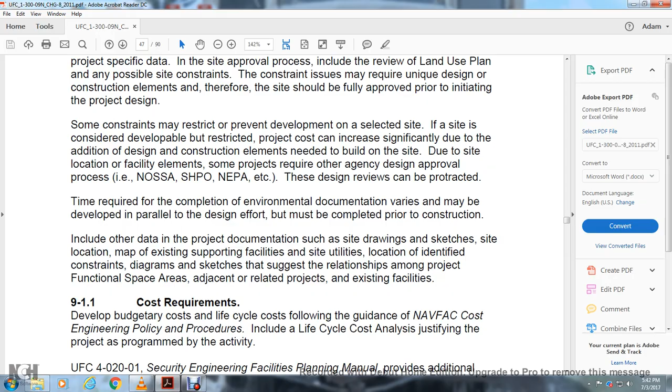Other data to include in project documentation: drawings, sketches, site location maps, existing support facilities, site utility locations, and identified constraint diagrams or sketches that suggest the relationship among project functional space areas, adjacent related projects, and existing facilities.

Cost requirements, development and budgetary costs, and life cycle costs should follow the guidance of the NAVFAC cost engineering policy and procedure, including life cycle cost analysis justifying the project's program activity.

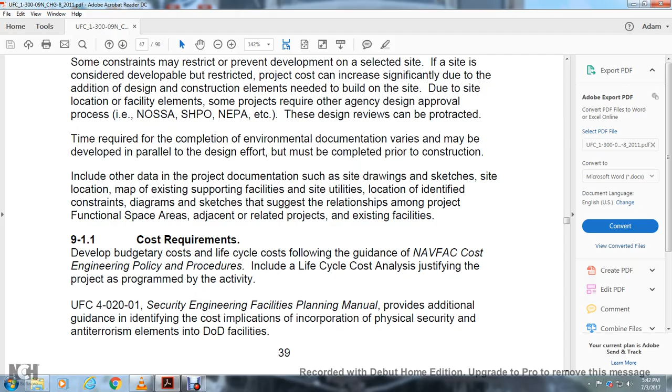UFC 4-020-01, Security Engineering Facilities Planning Manual, provides additional guidance for identifying cost implications in incorporating physical security and anti-terrorism elements into the DoD facility.

Department of Defense Form 1391. Typically, for Special Projects and MILCON projects, the DD Form 1391 identifies the special project or MILCON project number that makes available the review of the

EPG database. If a project does not use the EPG, attach the necessary project documentation to the products. Electronically approved projects reflect the EPG electronic signature in the EPG database. For more information about special authorization, see OPNAV

11010.20G, Furniture, Fixture, and Equipment (FF&E).

For specific guidance on furniture, fixture, and equipment, see UFC 3-120-10, Interior Design.

Engineer study: solar analysis, engineering analysis, and specific requirements concerning the engineer study. See UFC 3-410N, Mechanical Engineering Design, and Leadership in Energy and Environmental Design, or LEED.

Criteria and environmental requirements require contact for all required surveys, information gathering, and analytical testing. Specific guidance for conducting field investigations is provided within the specifications. See UFC

3-800-10N, Environmental Engineering for Facility Construction, review installation restoration plans (IRPs) and GeoReadiness databases, identifying development constraints that may include site contamination, hazardous waste, lead paint, PCBs, asbestos-abated issues, and controls related to natural resources such as historical structures, endangered species, wetlands, and the Clean Water Act.

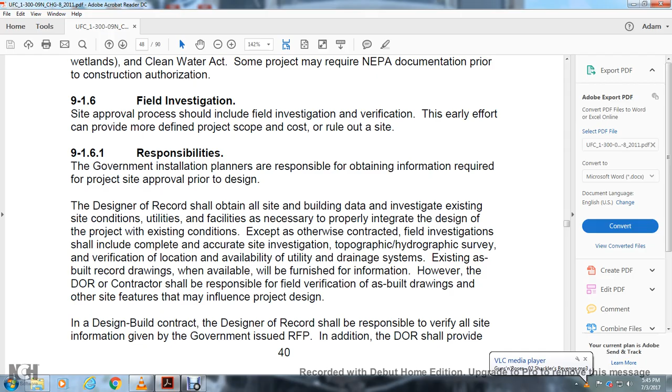However, the designer of record or contractor shall be responsible for field verification of as-built drawings and other site features that may influence project design. In a design-build contract, the designer of record shall be responsible for verifying all site information in the government's request for proposal.

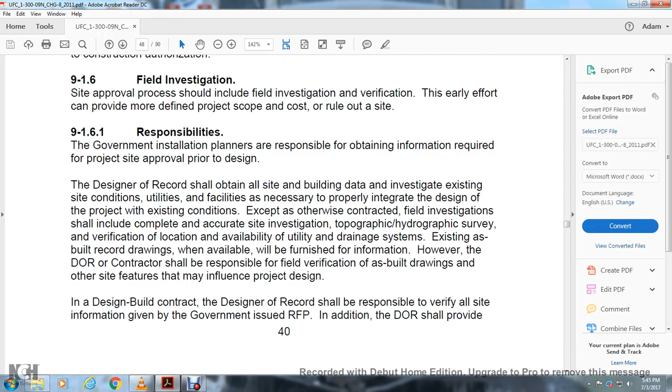In addition, the designer of record shall provide additional field investigation and verification of existing site conditions as may be required to support the development and design construction of the project.

Coordination: all site surveys, including topographical, hydrographical, and soil surveys, shall be coordinated with a representative of Public Works, Utility, Engineering, or Energy teams other than NAVFAC design personnel during the execution of field investigation work.

The designer of record shall also be responsible for all damages to personal property that occur as a result of fault or negligence.

The designer of record shall take proper safety precautions to protect the public and government property from physical hazards and unsafe conditions. Upon completion of the field investigation, return the property to its original condition, except as otherwise released in writing by the client activity.

9-1.7 Life Safety Code Survey. For specific requirements regarding Life Safety Code Surveys, see UFC 3610N.

Pavement evaluations: for specific requirements covering pavement design evaluations, see UFC 3210N. For topographical survey, the specific requirements concerning the topographical survey are found in UFC 3210N.

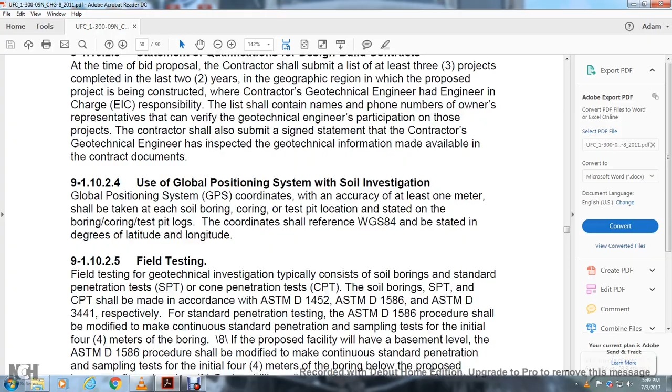Using global positioning system with soil investigation: GPS coordinates with an accuracy of at least 1 meter shall be taken for each soil boring or test pit location, stated on the boring or test pit log.

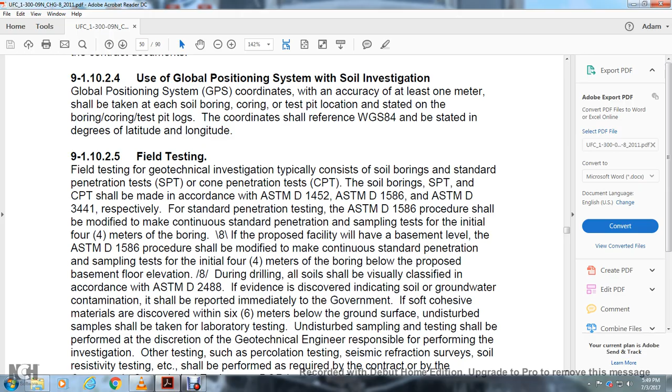The coordinates shall also reference WGS 84, stating degrees in latitude and longitude. Field testing of the geotechnical investigation typically consists of soil borings, standard penetration tests, and cone penetration tests.

Soil borings, SPTs, and CPTs shall be made in accordance with ASTM D1452, ASTM D1586, and ASTM D3441, respectively. The Standard Penetration Test, ASTM D1586, procedure shall be modified to make continuous standard penetration sampling for the initial 4 meters of boring.

If the proposed facility will have a basement level, the ASTM D1586 procedure shall be modified with continuous standard penetration sampling for the initial 4 meters of boring below the proposed basement floor elevation.

During drilling, all soils shall be visually classified in accordance with ASTM D2488, and if evidence of underground tank, soil, or groundwater contamination is discovered, it should be reported immediately to the government.

If soft cohesive materials are encountered within 6 meters below the ground surface, undisturbed samples shall be taken for laboratory testing. Undisturbed sampling and testing shall be performed at the discretion of the geotechnical engineer responsible for the investigation.

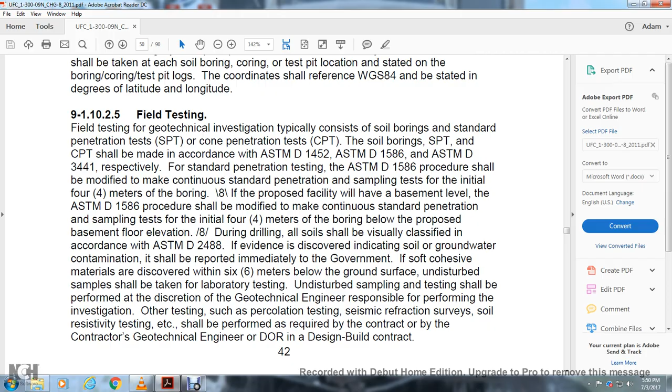Other tests, such as percolation testing, seismic refraction survey, and soil resistivity testing, shall be performed as required by the contract, or by the contractor's geotechnical engineer, the designer of record, in the design-build contract.

9.1.10.2.6, Use of piezometers. A drilling technique is used to allow measurement of the water table level. The contractor shall install 2 piezometers per drilling site to more accurately measure the depth of the water table.

Piezometers are required for stormwater pond investigations. Piezometers are not required if the groundwater level can be accurately measured during the drilling operation, or if there is no evidence of the water table within the depth of the boring or zone of influence of the foundation structure.

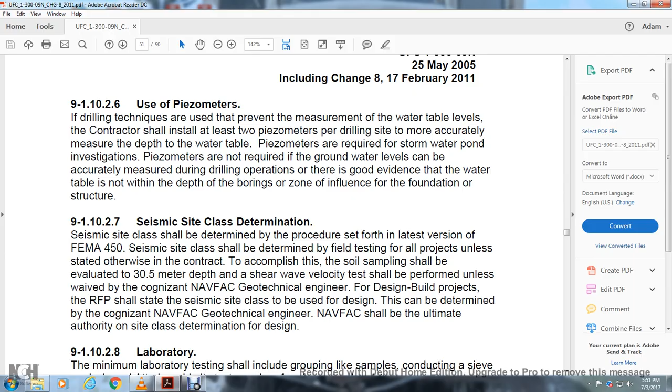Seismic site and class determination: seismic site class shall be determined by the procedure set forth in the latest version of FEMA 450. Seismic site class is determined by field testing on all projects unless stated otherwise.

The soil sample shall be evaluated to a 30.5 meter depth for shear wave velocity. This shall be performed unless waived in coordination with the Navy facility geotechnical engineer for the design-build project.

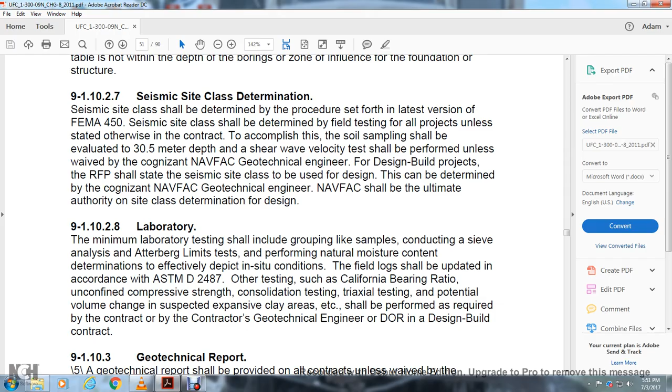The request for proposal shall state the seismic site class to be used for the design. This can be determined by the cognizant Navy facility geotechnical engineer. Navy facility engineering shall be the ultimate authority on site class determination for the design.

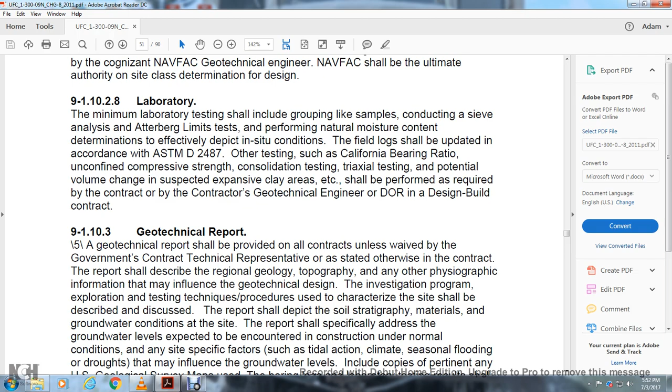9.1.10.2.8 Laboratory. Minimum laboratory testing should include groups of like samples conducting sieve analysis, Atterberg limit tests, and performing natural moisture content determination to effectively depict in-situ conditions. The field log will be updated in accordance with ASTM D-2487. Other testing such as California bearing ratio, unconfined compressive strength, consolidation testing, triaxial testing, potential volume change, in suspected expansive clay areas shall be performed as required by the contractor, geotechnical engineer of record, in design-build contracts.

9.1.10.3 Geotechnical Report. A geotechnical report shall be provided on all contracts unless waived by the government contracting officer's technical representative or as stated otherwise in the contract. The report shall describe regional, geographical, topographic, and other physiographic information that may influence the geotechnical design. The investigative program, exploration, and testing techniques and procedures used to characterize the site shall be described and discussed. The report shall depict soil stratigraphy, materials, and groundwater conditions at the site, specifically addressing the groundwater level expected to be encountered during construction under normal conditions, and any site factors such as tidal action, climate, seasonal flooding, or droughts that may influence the groundwater level.

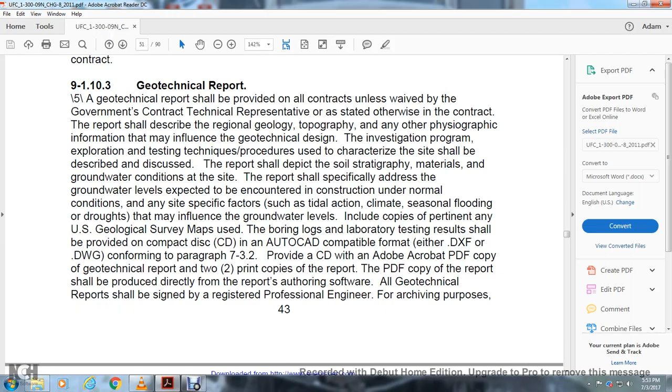The report shall include copies of pertinent USGS maps, boring logs, and laboratory testing results, provided on a compact disc in AutoCAD compatible format, either DXF or DWG, conforming with paragraph 7-3.2, along with a CD containing an Adobe Acrobat PDF copy of the geotechnical report, two printed copies of the report, and the report's authoring software files. All geotechnical reports shall be signed by a registered professional engineer for archiving purposes. A PDF copy of the geotechnical report shall be sent directly by mail to the respective Echelon 3 command with the project residing in their area of responsibility.

Navy Facilities Atlantic Capital Improvement Geotechnical Section, 6506 Hampton Boulevard, Norfolk, Virginia 23508-1278; or Navy Facilities Pacific Capital Improvement Civil Geotechnical Section, 258 Makalapa Drive, Pearl Harbor, Hawaii 96860.

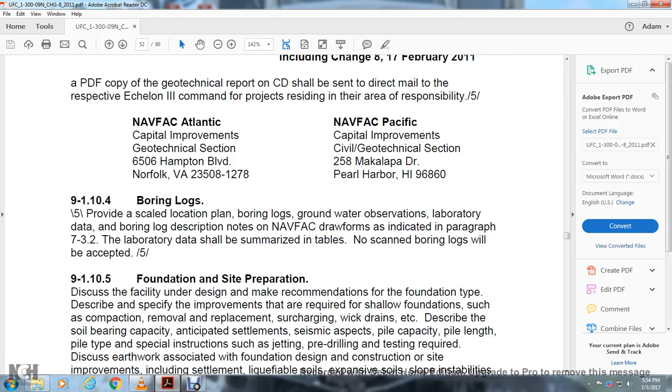9.1.10.4, providing scaled location plans, boring logs, groundwater observations, laboratory data, and boring log descriptions on the NAVFAC drawforms indicated in paragraph 7-3.2. Laboratory data should be summarized in tables. No scanned boring logs will be accepted.

Foundation and site preparation: discuss the facility under design, making recommendations for the foundation type. Describe the specific improvements required for shallow foundations, such as compaction, removal, replacement, surcharging, and wick drains. Describe the soil bearing capacity, anticipated settlement, seismic aspects, pile capacity, pile length, and pile types. Note special instructions such as jetting, pre-drilling, or testing if required.

Discuss earthwork associated with the foundation design and construction of the site, including improvements related to settlement, liquefiable soils, expansive soil, slope instabilities, and near-surface groundwater. Discussion should address existing conditions, study and analysis, and recommend mitigation of the effects of these conditions. Address dewatering and sheeting or shoring considerations for design and construction, as applicable and required by the designer of record.

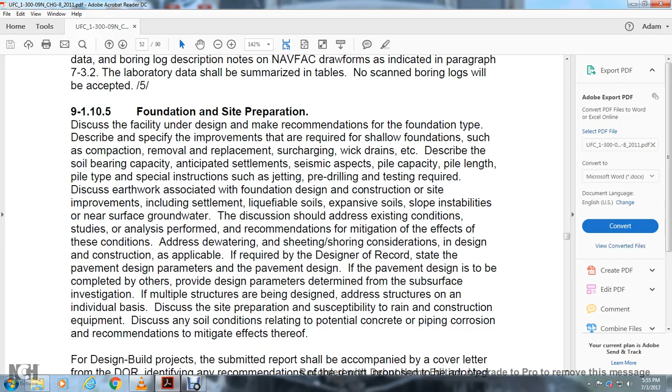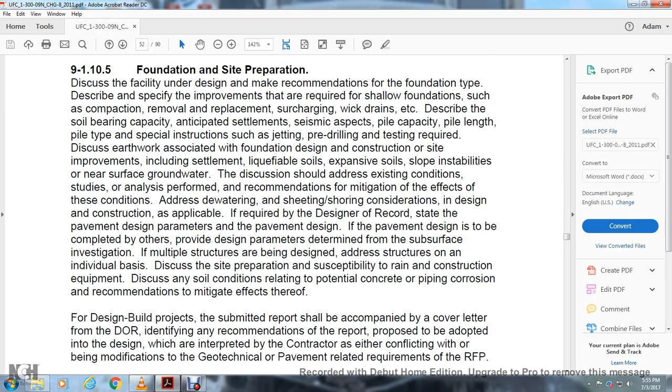State the pavement design parameters to meet pavement design requirements. Pavement design is to be completed by others, with design parameters determined from the subsurface investigation. If multiple structures are being designed, address structures on an individual basis. Discuss site preparation susceptibility to rain and construction equipment, and discuss any soil conditions relating to potential concrete or piping corrosion, with recommendations to mitigate these effects.

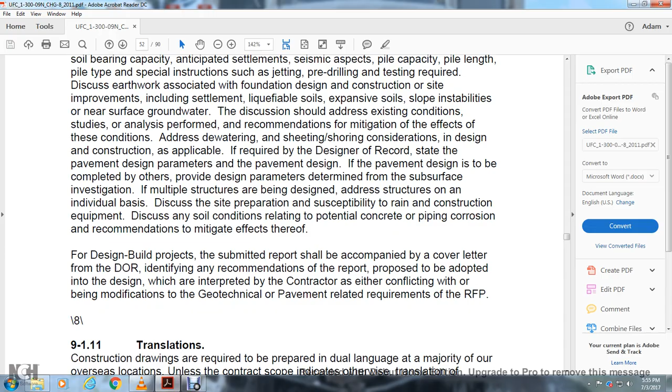For design-build projects, the submitted report shall be accompanied by a cover letter from the designer of record identifying which recommendations in the report are proposed to be adopted into the design, and which are interpreted by the contractor as conflicting with or modifying geotechnical or pavement-related requirements of the request for proposal.

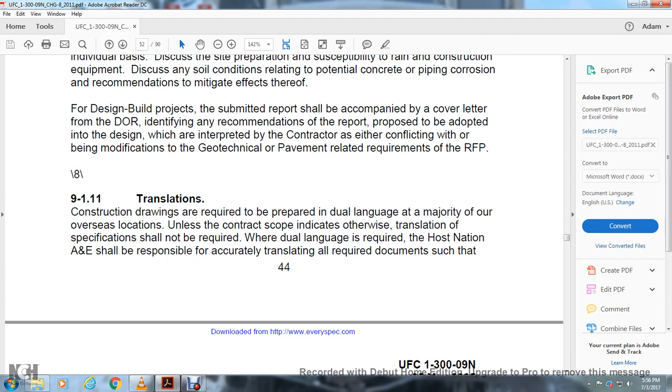9.1.11 Translations. Construction drawings are required to be prepared in dual language at the majority of overseas locations. Unless the contract scope specifies otherwise, translation of the specifications shall not be required. When dual language is required, the host nation A&E (architect-engineer) firm shall be responsible for accurate translation of all required documentation, ensuring it is clear and comprehensible to the local construction community.

The host nation A&E may be contracted to translate government furnished studies, surveys, geotechnical reports, product specifications, host country requirements, and other technical documents prepared in foreign language, along with interpretation services for meetings with local officials and contractors. Translation should be included with the pre-final submittal through project completion.

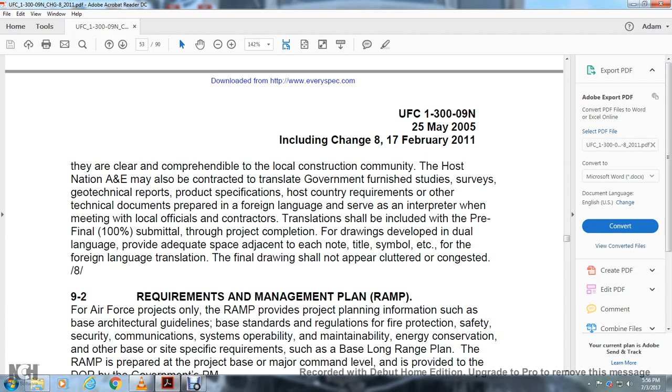For drawings developed in dual language, provide adequate space adjacent to each note, title, symbol, etc. for the foreign language translation, so that the final drawing does not appear cluttered or congested.

9.2, Requirements and Management Plan, or RAMP. For Air Force projects only, the requirements and management plan provides project planning information such as base architectural guidelines, base standards and regulations for fire protection, safety, security, communications, system operability, maintainability, energy conservation, and other base or site-specific requirements such as the base long-range plan. The requirements and management plan is prepared at the project base or at the major command level, provided to the designer of record by the government program manager.

Chapter 10, Design Submittal Requirements.